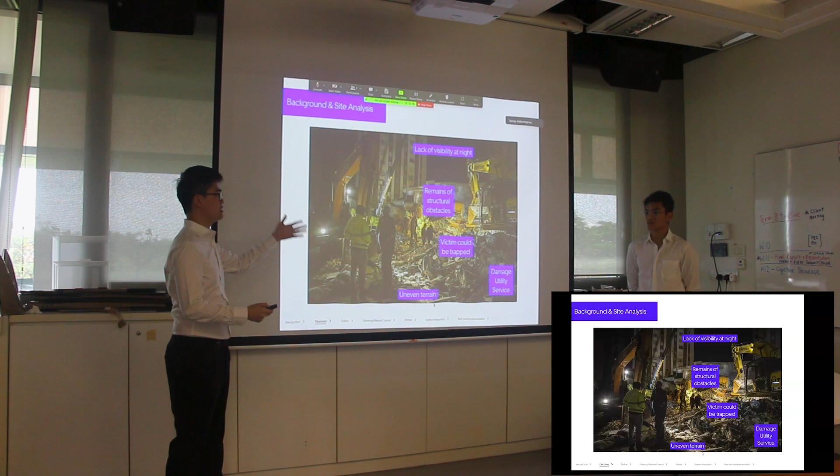Just to recap, we started with a very open problem statement and we narrowed it down by looking at disaster sites, identifying the challenges involved. We also conducted a study to understand the stages of search and rescue and identified that the reconnaissance stage is the most crucial. On top of that, we also did a stakeholder analysis to understand the personnel involved.

With all of the information that we have, we created the house of quality matrix and identified 6 important functional requirements for our project. But also considering the constraints that we have, we narrowed down our scope to only operate 1 drone, but simulate multiple drones working together, each carrying 1 detection mechanism.

With all of that, this is our refined problem statement: how might we optimize the search and rescue process in a disaster scenario using human-drone collaboration for enhanced target detection over versatile terrain.

To elaborate a bit, what we meant by guided autonomy here is that the human has to give a goal to the robot, but the robot has to autonomously decide the steps it takes to achieve that goal.

From all of that, we will give you an overview of our project, and this is how it looks like. We have the mission control, the sensor, and how they all integrate together with the drones. I'll pass my time to Paulong to take you through our mission control.

Thanks, Ivan. So we first start with planning. How can the drone know where to search given the user input of the hotspot? We do this based on metrics like guaranteed capture or minimum time capture. So we decompose the planning problem into 3 subtasks: clustering of the hotspots, assigning drones to the cluster, and finally, drone searching within the cluster.

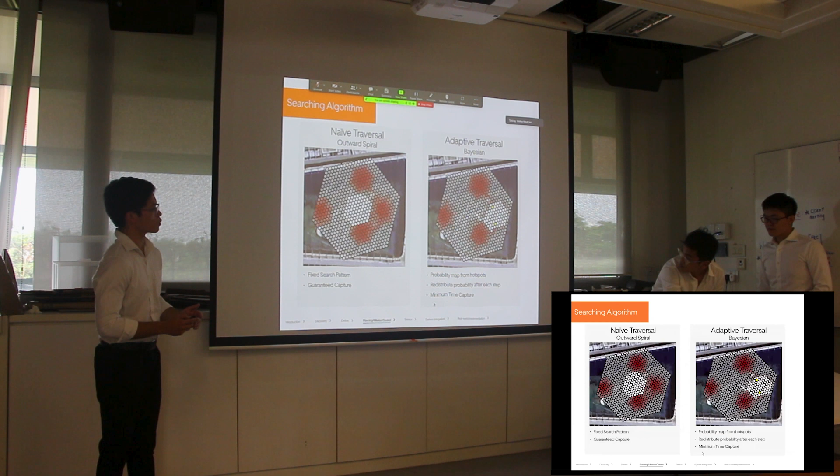For searching, we're focusing on naive or adaptive traversal and didn't try reinforcement learning because the first 2 methods have shown very promising results. On the left-hand side, for naive traversal, the drone will simply do an outward spiral. This goes for guaranteed capture by covering all the cells, while for adaptive traversal, the drone will aim for the area with the highest probability, aiming for minimum time capture.

With that, we have achieved our first checkpoint: scalability to larger areas using our search algorithm. Next we'll show how we integrate everything together into our mission control.

Thank you, Paulong. I'll be sharing about our mission control, which is essentially the user interface the drone operator has with the MASNRD system. So what does it do? The drone operator can input hotspots, which are objectives for the MASNRD system to search, and it allows you to define clusterings, do assignment, and also execute emergency drone actions, as well as real-time drone monitoring.

So this is the user journey that the user has when they interact with MASNRD. First, they input hotspots, and then the MASNRD system will cluster these hotspots. The user would then confirm clustering before assigning these drones to do independent search over these clusters. The drones will also feed back to the UI whenever they find a victim and conduct the search independently.

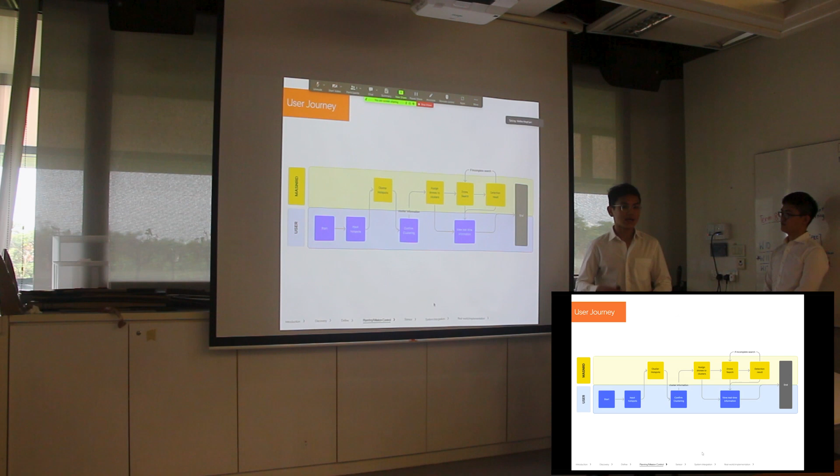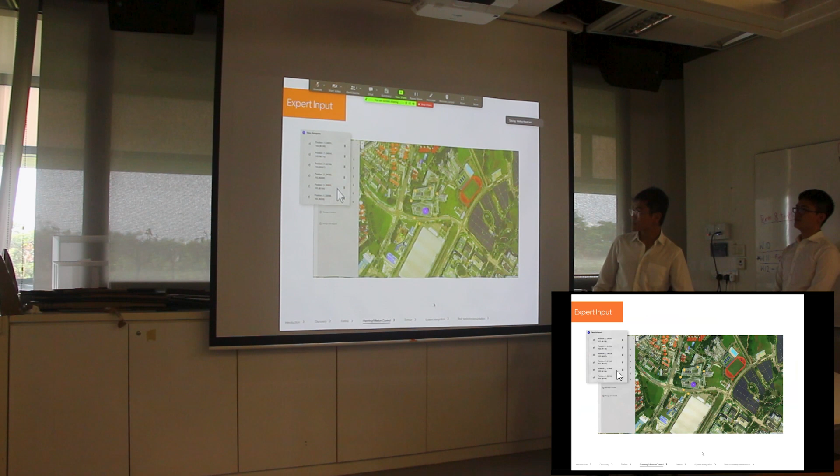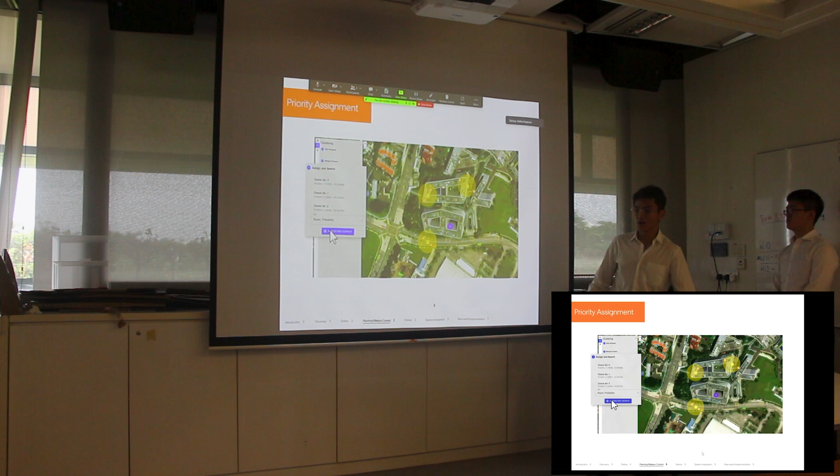You can also have expert input of hotspots, which will then be smartly clustered together, with neighboring hotspots clustered together, and then assigned in a priority queue to different drones before doing a probabilistic search over these clusters. So this is a demonstration of the user interface and how the drone operator can use it.

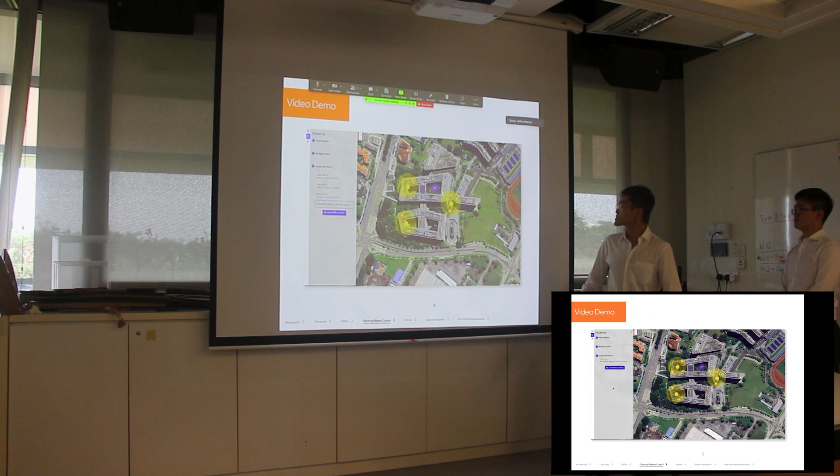As you can see, the drones are being dispatched to these different clusters, and over these paths, the drones would then search, and as you can see, the markers at the places where victims are detected are shown here on the map.

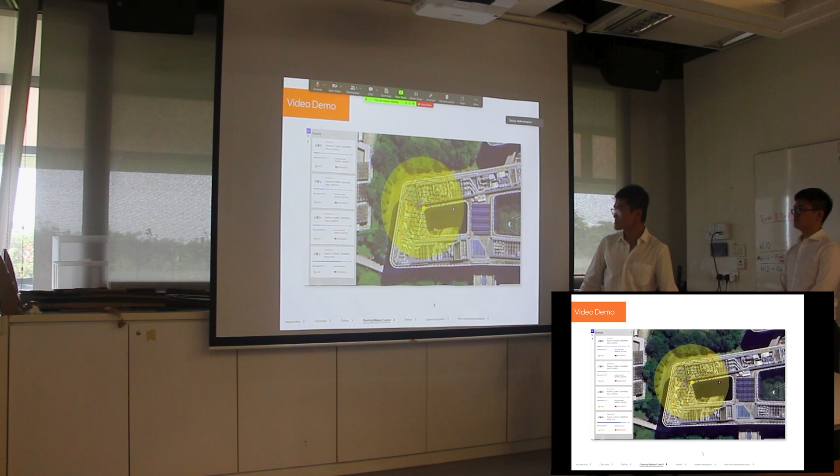So now we've achieved remote operation and guided autonomy. Now I'll pass the time to Axel, who will be sharing about sensing.

Thank you, Waishan. So our sensor is designed to detect RF signals based on the following design criteria: range, permeability, field of view, response time, and battery consumption.

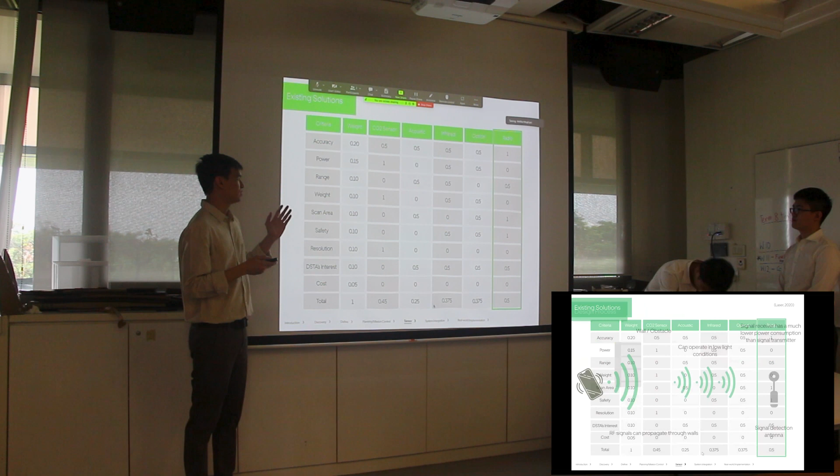Based on our literature review, we identified existing solutions used in search and rescue missions and weighed them against several design requirements. Eventually, we settled on radio as it was most suitable for our project.

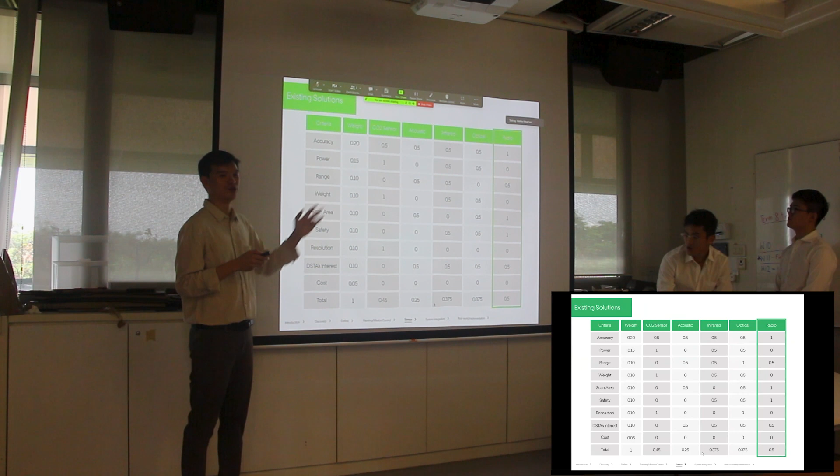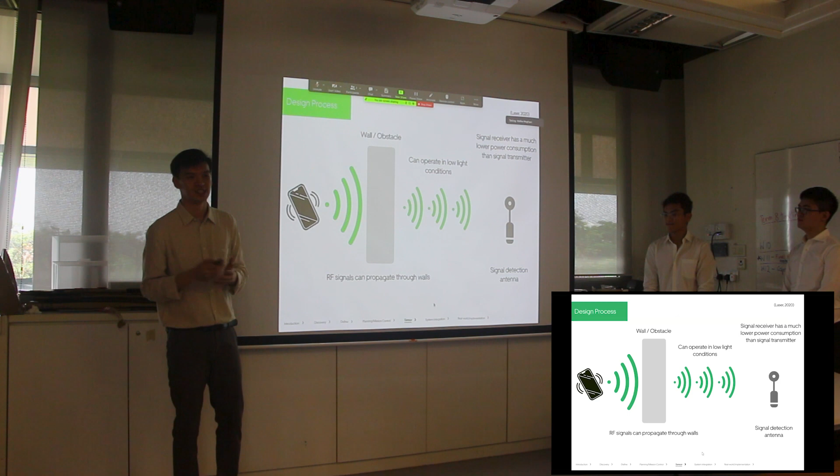Our latest addition is our final prototype, which detects and quantifies the RSSI of most RF signal sources across a wider frequency spectrum. It also comes equipped with a directional waveguide and is capable of FFT for signal processing. However, it is slightly heavier compared to the other prototypes we have developed.

An access point is paired with the sensor to spoof known access points within the disaster region. Because any mobile device with Wi-Fi settings turned on will automatically begin to connect to known access points, we can force a more consistent transmission of packets between connected mobile devices and the access point, making it more easily detected by the sensor.

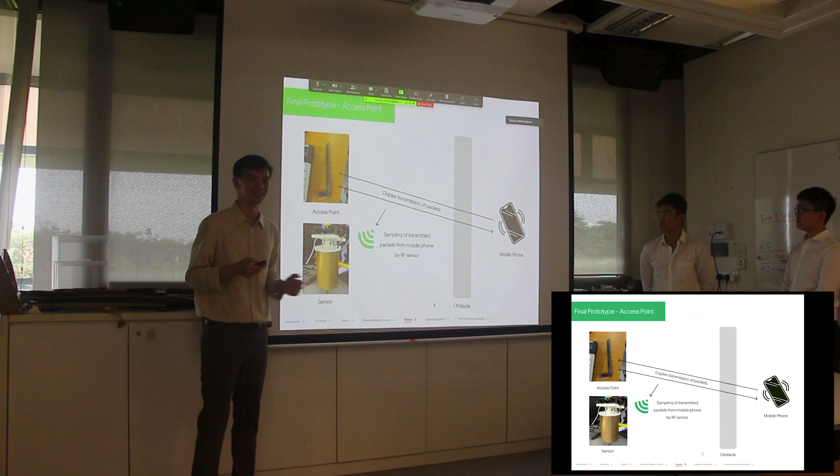Next, the onboard computer takes the FFT processed signals from the SDR to identify active communication channels. It uses unsupervised machine learning methods and a technique called HDBSCAN.

Now I'll pass my time over to Ryan.

Thanks, Axel. Now I'll give you guys a bird's eye view of our entire system. The middleware is the brain of the drone. It communicates with the flight controller to get GPS coordinates, hands it over to the path planner to compute path planning information, which is then handed back to the flight controller to tell the drone where to actually go.

In terms of detection, when the RF sensor detects a signal, it passes it over to the middleware, which hands it over to the mission control.

The mission control consists of 3 main components. The server arbitrates information exchange between users and the drones, while handling all necessary clustering and task assignment, while keeping the user in the loop.

In terms of firmware, our flight controller runs the PX4 flight stack, which can be controlled through remote control, mission control firmware like QGroundControl, or an onboard computer running ROS2. The last one is how we control the drone.

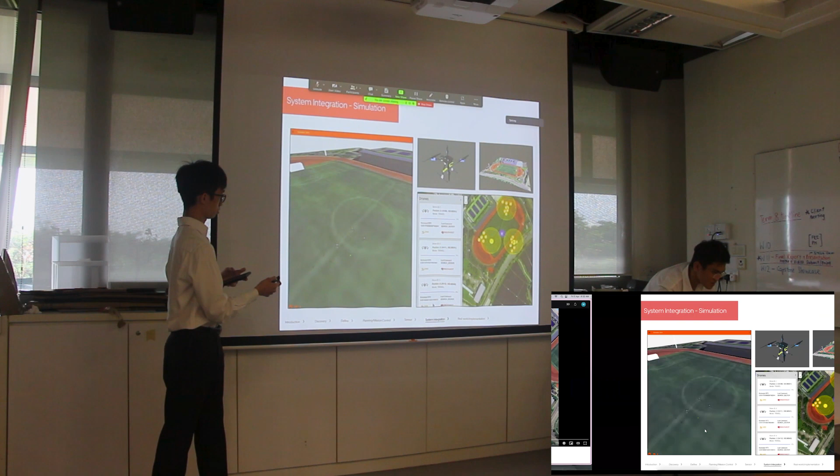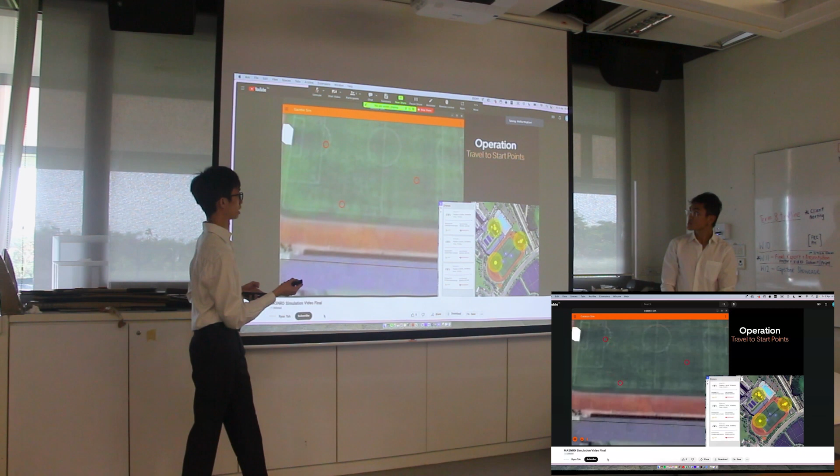First, the user enters several hotspots as shown here. The mission control computes the clustering and distributes these tasks to the drones. Then the drones will autonomously travel to the start points and begin conducting their own search operations. Over here you see an exhaustive spiral search.

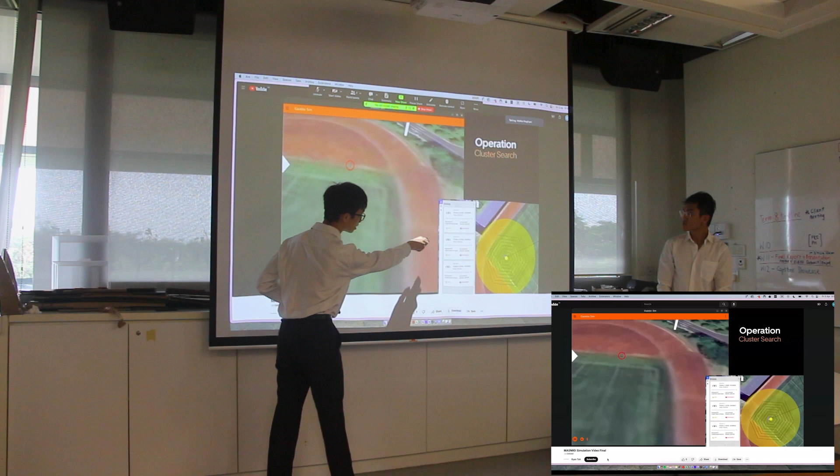Its mode, potential, and estimated connectivity are all reflected here in the GUI. In the event of an emergency, the user can still conduct emergency landings and all that.

So by testing the drone in the drone arena and in various environments in Gazebo, we can enable efficient testing in various terrains. Now I'll pass my time over to Kobe.

Alright, thanks Ryan. Now that we've seen the simulation, we'll be looking through the real-world implementation.

So this is the layout plan for our showcase and testing. We will be flying the drone around in the aerial arena with phones lying around on the floor here.

At level 7, our main operator will operate the mission control and will also connect the RTK base station there. For safety reasons, we'll have a drone operator on ground for emergency takeovers.

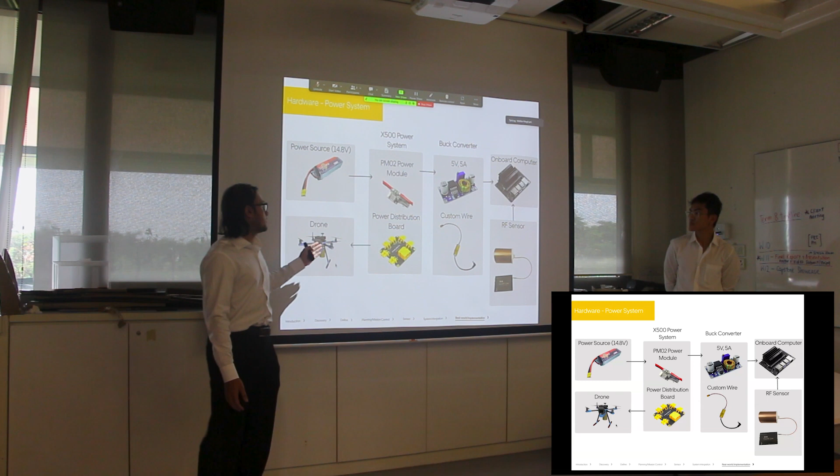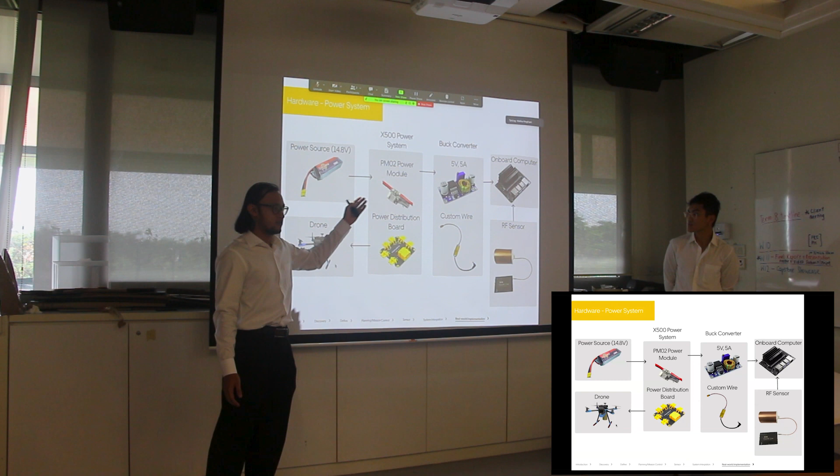To power our drone, we'll be using a 10,000 milliamp hour battery and we'll be using the existing drone power system to power both the drone and the onboard computer. For the onboard computer, we'll be stepping down the power to 5 volts, and we'll also be powering the RF sensor through the onboard computer.

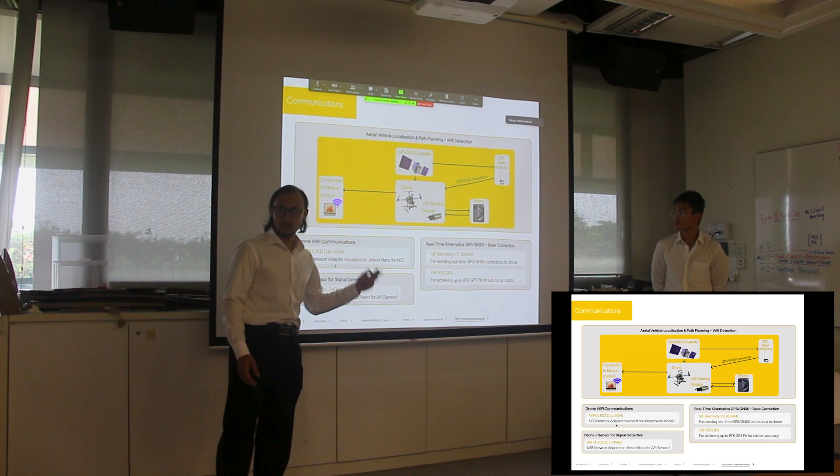The drone has several communication devices. First is the real-time kinematics for localization, and for communication with the mission control, we'll be using 5 GHz Wi-Fi, and we'll also be using a 2.4 GHz Wi-Fi for our AP, which tries to create a connection with the phone. Now I'll pass the time to Daniel to talk about our results.

The problem with this is that it requires the operator to input a lot of different waypoints. In a search and rescue mission, time is of the essence, and we need to ensure we can do it instantaneously. This capability is not available because the disaster situation is always changing, and we cannot instantaneously accommodate that.

One of the issues is also inaccurate GPS estimate, which can be understood from the telemetry communications. It's using a 915 MHz telemetry, so the data rate is not as efficient as using a 5 GHz telemetry, which can send more data wirelessly. While it is still customizable, it is inflexible because some components are fixed into the ecosystem. So we have a solution for that.

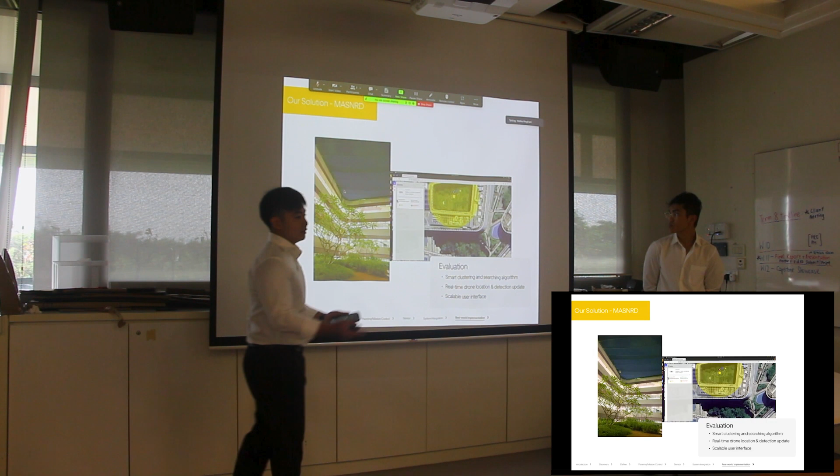That is quite useful for first responders because they can see in real time that there is a casualty there. More information can be seen here regarding the drone ID, so we know which drone we are tracking. We also know the lat and long, and also landing and disconnecting the onboard computer in case we want to debug the problem with respect to the drone.

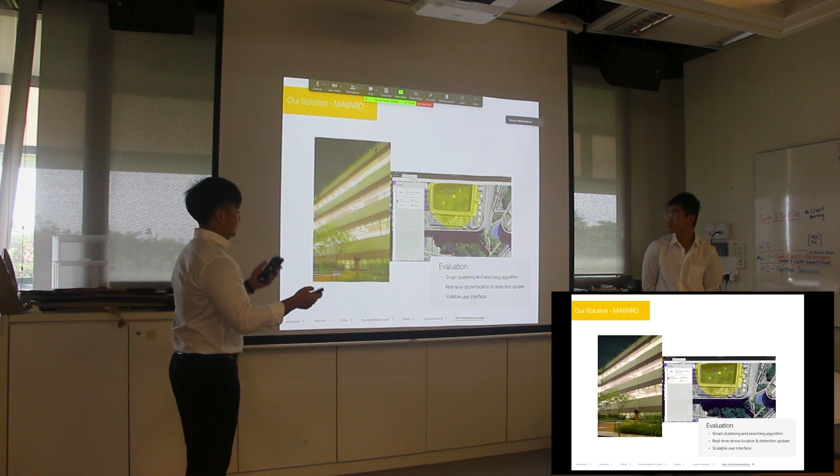So we thank you for your time. However, next we'll go on to the poster.

For the poster, we want to highlight 3 main components. The first is the sensor with the directional waveguide running the signal processing algorithm, doing some Bayesian processing. The second component is the Bayesian pathfinding for faster search, which allows both adaptive and naive traversal. Lastly is visualization, which is about the simulated environment in Gazebo and the mission control graphical user interface.

I just want to take this time to thank our academic mentor, Prof. Malika, for help, and our industry mentor, Jonathan, for his assistance, and Prof. Willett for his assistance throughout the signal processing, and Patrick for his help with the communication side of things. Yeah, thank you.

I think it's very impressive how the team has come a long way since the first presentation, the first iteration. There's a lot of good details they've gone through in terms of the engineering study and trade-off studies. Absolutely, absolutely. Thank you so much.

I think we're going to show a quick video for the demo. Are we? Oh, is this one? Is this the one that we showed? Okay, okay.

Then okay, then we will do Q&A now. So Jonathan and, sorry, you guys want to start off with the questions?

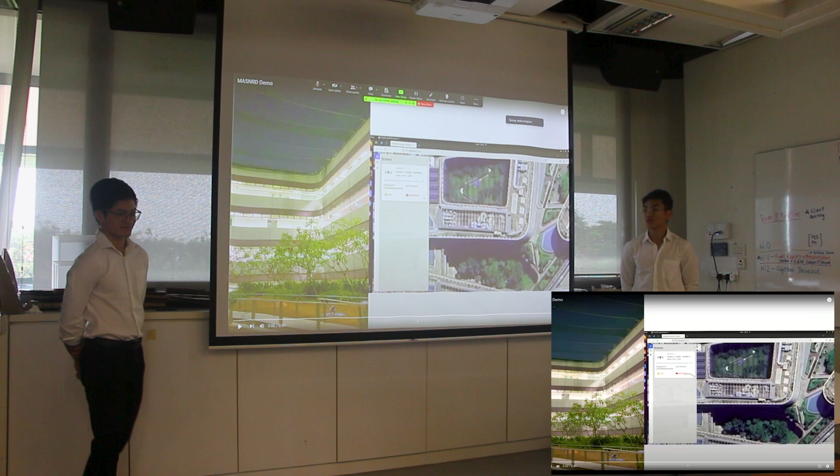Okay, great, good. What was your biggest challenge since the first iteration to now? Was it hardware, software, integration? Both.

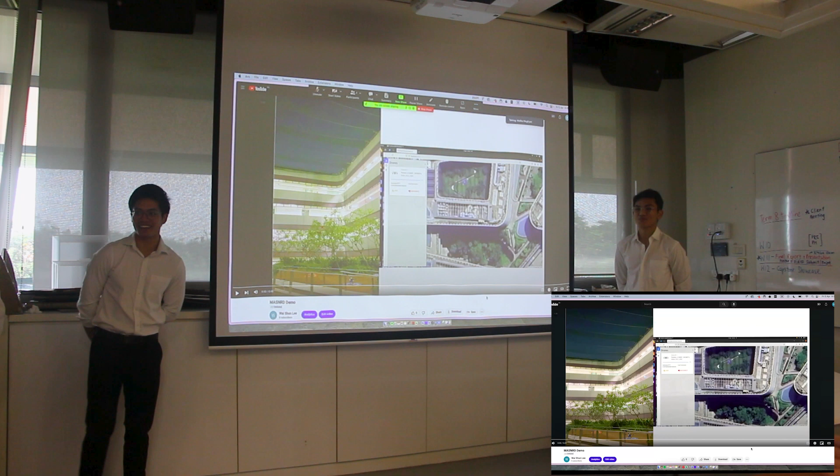I think maybe we start with the sensor. Maybe Ivan can shed some light on that. Maybe we can go one per area. Maybe we can share our sensor, but all be in view so that you're in the camera view.

Okay, so developing the sensor was one of the major challenges we faced in completing this project. For half the time of this capstone project, we were analyzing signals in the time domain, which proved to be quite fruitless because, given the high frequency of the RF signals, we cannot capture any noticeable change in the signal in order to accurately quantify that there is an active communication channel there.

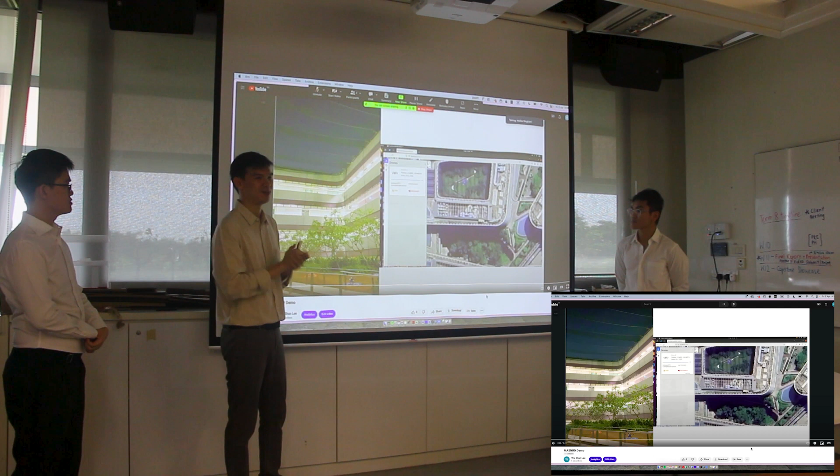We had to make the swap to the HackRF One SDR to use fast Fourier transform, so we could do processing in the frequency domain. That allows us to see the contributions of the different frequency components when we detect a signal, for example. That thing is a lot more noticeable, and it's much more efficient in extracting the data we need for signal discrimination.

We must also be aware of how much computing power we have, because we just have limited power. So initially, when we tried to sweep a very detailed waveform, it was actually taking a lot of time, and a lot of data to process at the same time. We had to try and error to find a sweet spot, to see how often we should sweep, what bandwidth we are sweeping at, and also how it can be quickly processed.

We also tried out different kinds of unsupervised machine learning methods to experiment and explore which one performs the best. I think one of the highlights we want to talk about for HDBSCAN is the fact that it doesn't require us to pre-specify how many clusters or how much to differentiate.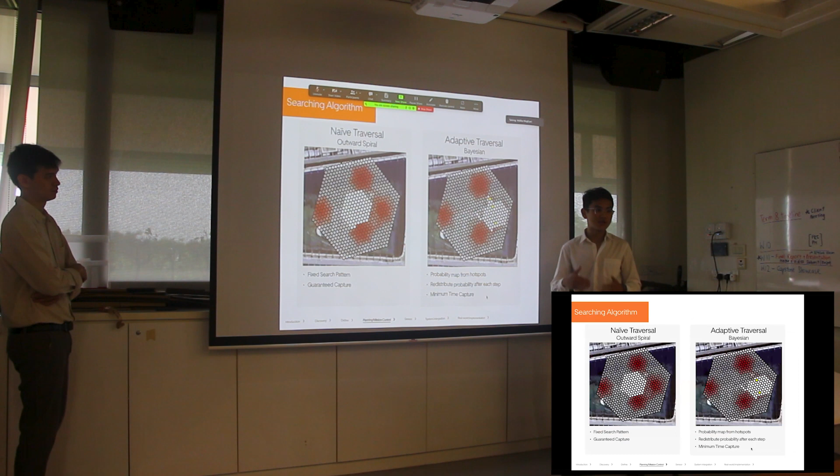So when we did our field trials, we had to account for that and add different checks, like can we adjust the angle of movement, can we look at how fast or slowly it moves—hyperparameters we can change in terms of adjusting the algorithm so that it works in real life.

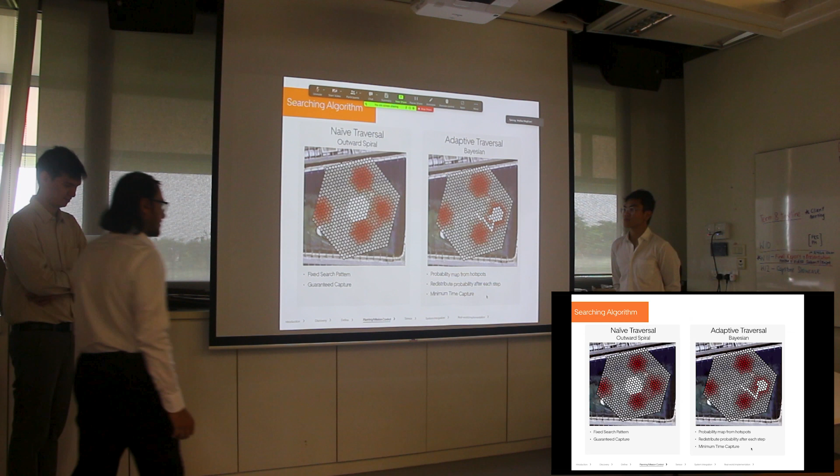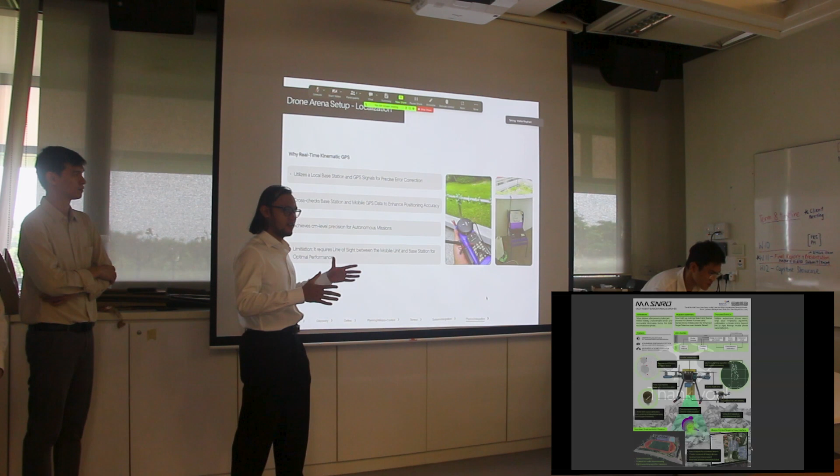In terms of testing, we had problems with localization because our drone originally relies heavily on GPS, and because the drone arena is an enclosed area, the GPS doesn't work well. We tested if it was a GPS problem, and found that it was because of the drone arena—we flew it in Marina Barrage to test the GPS and it was fine there.

Thankfully, the Trust Lab has a built-in RTK antenna on top of level 7. We tested it out and managed to get pretty good localization as well.

Let me elaborate more. The RTK antenna is basically sending GPS or GNSS corrections to your GPS, because GPS alone is not as accurate. This antenna is located outside of SUTD, and that, along with your drone's F9P RTK GPS, is able to compute all the differences, giving a much higher localization capability for the drone.

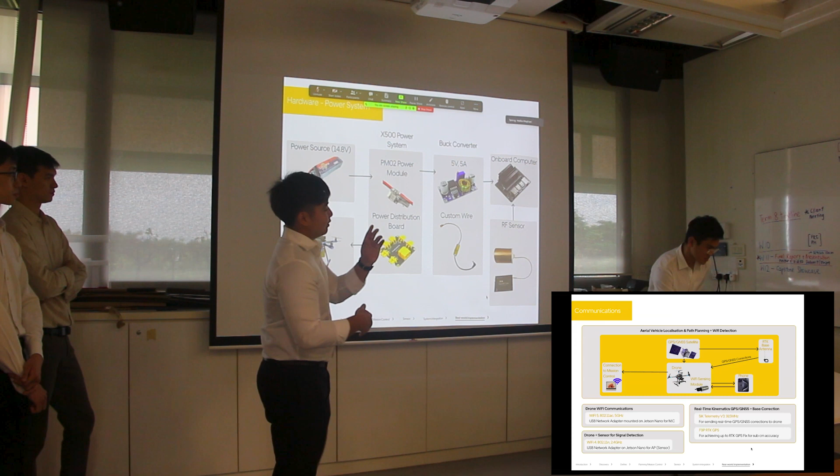Another thing I want to discuss is the communications side of things. Initially, when we wanted to run ROS messages over to the drone via the ROS stack, we wanted to use PPPD, a point-to-point protocol daemon. However, the problem was that when we tried to use it, it seemed to interfere with the communications, so we opted to use the SUTD drone arena Wi-Fi to send the communication over, and we found that it worked somewhat better.

I'm pleased that you had to go through the challenges, especially for the GPS accuracy, because in real life your GPS will not be so good. So it forces the team to find alternatives, like putting an RTK antenna somewhere higher, on higher ground. So whether it's intentional or not, the SUTD drone cage GPS degradation is really good for drone teams, I feel. It doesn't give you the ideal world state, which is what you're really designing for.

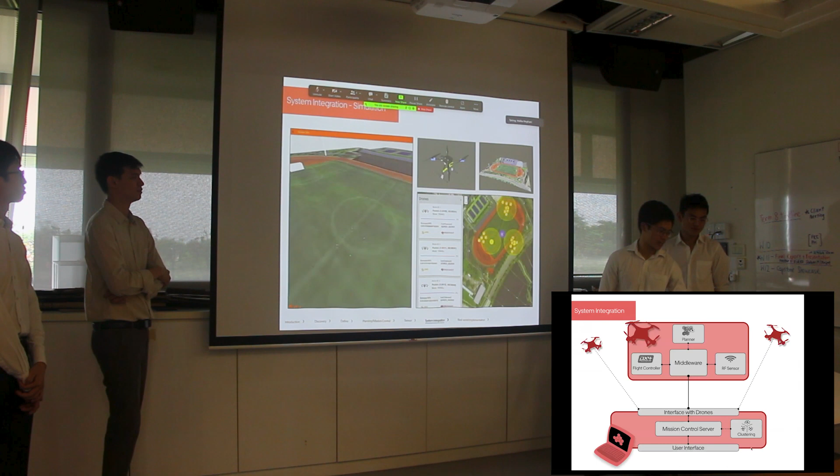Just to add on, everyone has like a piece of the sensor, the drone, then every single part has its own challenges. But the biggest challenge I think is how we integrate all the components together. When we put everything into the drone arena, when we do all the bench testing on the Jetson, on the battery, on the power plug, everything works fine. But when the drone starts to fly, you have all the systems running on the same onboard computer, and on battery, then we start to have a lot of problems.

So this video, we actually only managed to capture last night, at the very last minute. We spent day after day trying to integrate everything together. Sometimes it rains, sometimes there's a bug, no battery or something. So yeah, the integration is also one big challenge. Especially for real life, even in the working world, you worry the night before it starts. Well, praying.

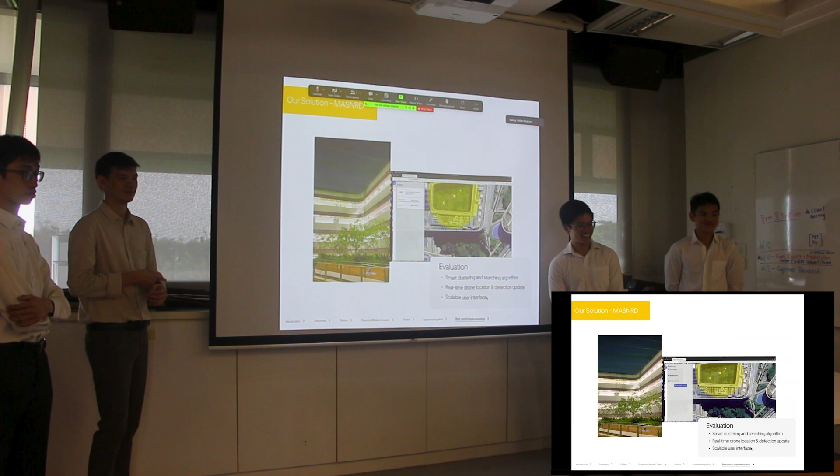So what was the main problem that you faced before that last night? What were the main issues?

So we have a few integration steps. We first tested with this QGC baseline, which just controls the drone by sending latitude and longitude based on this. Then we convert over using our own mission control. For this, we need to integrate our own search algorithm inside, and we have our own communication link. The communication link when you use telemetry is very weak, so we switch over to using Wi-Fi 5 GHz. And with that we had to try out a few different ways to set up the Wi-Fi.

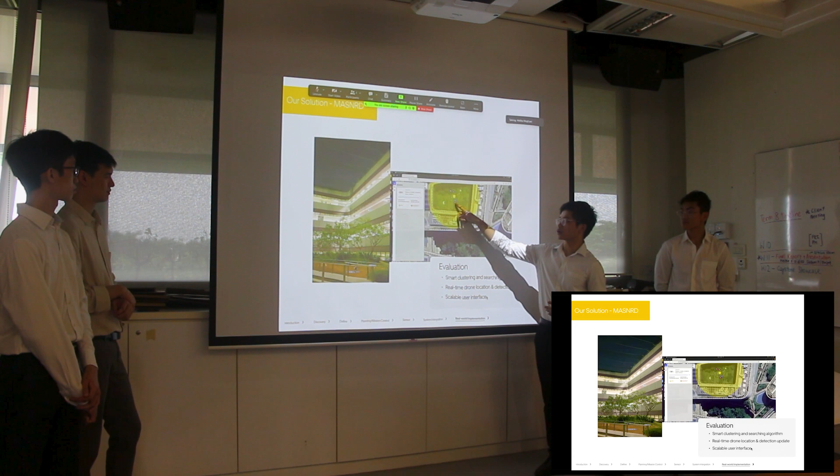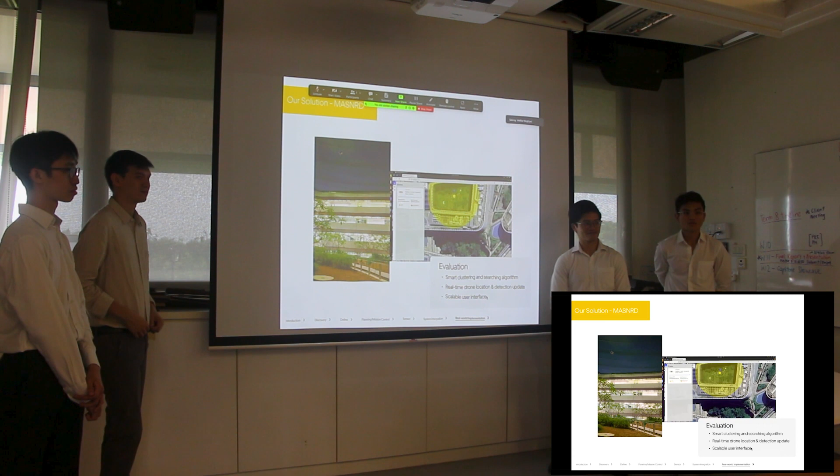And last night was our final step in the integration. We tried to have real-time detection shown here. So you can see you have one phone here, then another phone here. Then as the drone covers, you will spot two detections. So that's what we try to show you guys later at 11:30.

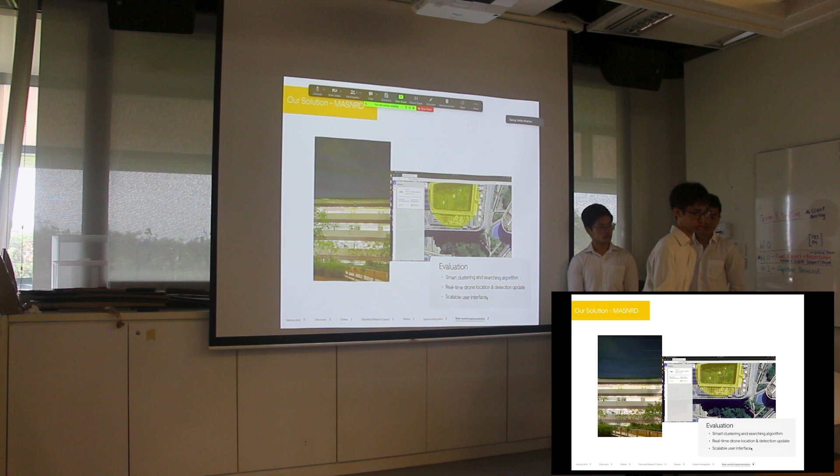So the QGroundControl one that he mentioned earlier was direct to the flight controller, but for our system we needed to arbitrate everything through the onboard computer, which posed more issues in terms of simulation as well as transferring from simulation over to the physical implementation.

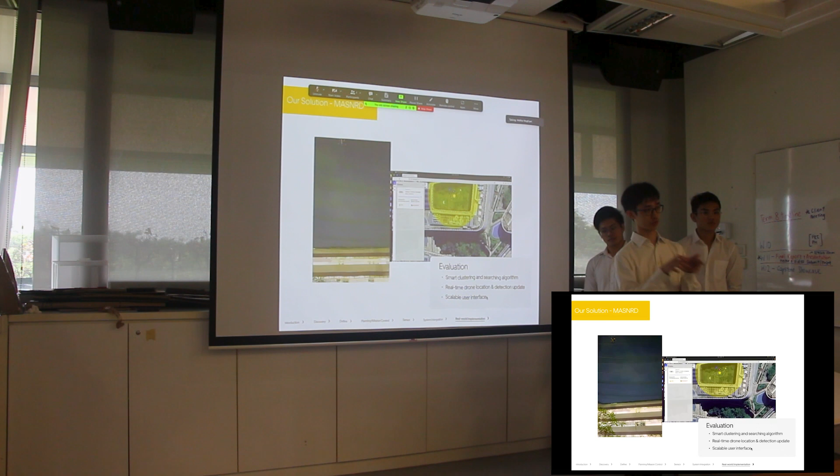So now you have the first working prototype, everything's working. Right? So what do you think will be the main improvement you would want to make if you were to continue the project? I think one of the biggest problems we've seen so far is how can we get a very sensitive sensor detection. When doing this, you need to manage the threshold a lot, and depending on the noise of the environment, you need to either raise or lower the threshold. So that's one thing where we maybe can use some smart algorithm to detect the threshold instead of manual adjustment.

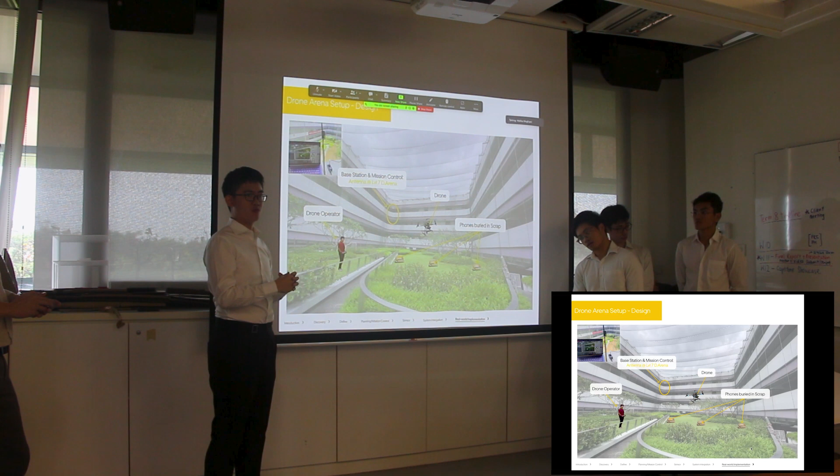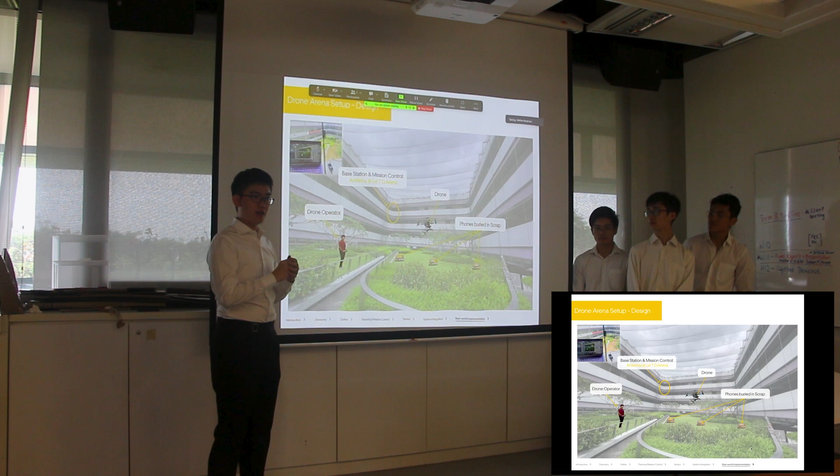And then just to add on, I think in the real world scenario, we can use more than one detection mechanism, because we can understand it as sources of information. If you're just relying on one particular source of information, it could be limited. So we think that if further development could be added with more detection mechanisms, but for the scope of our project, with the time that we have, we wanted to do something that is more novel, and that's why we limited it to just Wi-Fi detection. If we have more time and more scope, then we might want to involve computer vision, infrared, or other kinds of detection mechanisms to form a better understanding.

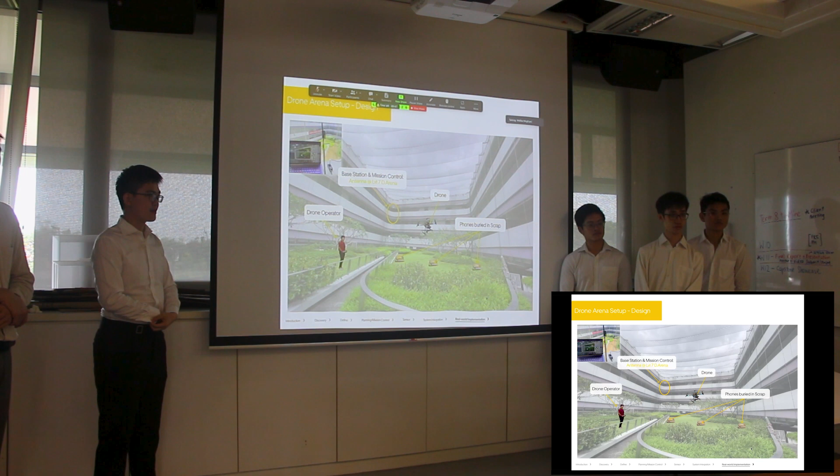Do you want to upsize the drone? Yeah, multi-drones?

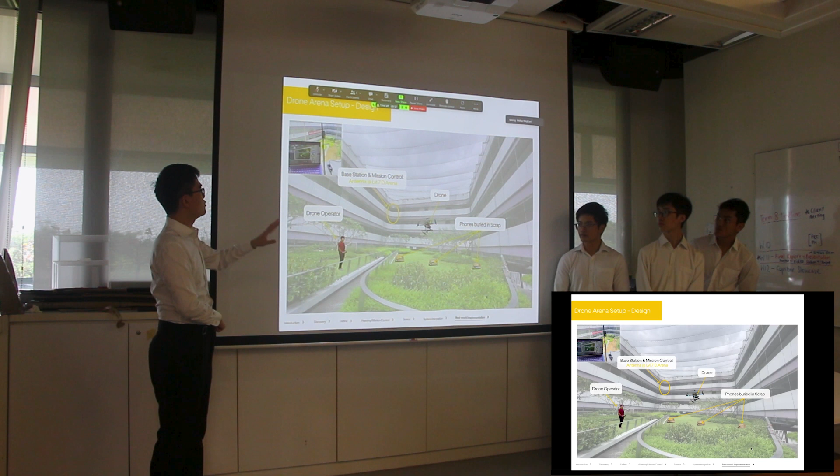So I think for a multi-drone system, we worked really well to have the simulator working with multiple drones. But in real life we faced challenges with multiple drones flying together. There are also safety concerns, because the drone operator had to manually take over, especially even flying this current single drone.

The manual takeover is a very important feature, and it's usually quite taxing for the drone pilot to stay focused and make sure everything is safe. So to fly multiple drones at the same time, we might need a bigger team to handle the physical constraints we're facing. A more physical demonstration of multiple drones is something we want to achieve, but at least on the simulator, theoretically, it will handle multiple drones.

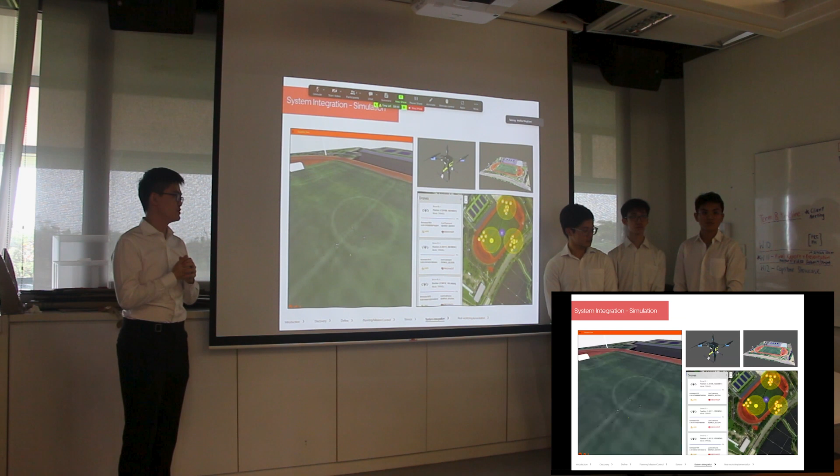And you want to say something about ROS too? That's the latest industry standard, recently released. ROS 1 used to be the standard for industry and academia, and ROS 2 is the latest one. People are making sure all their newer systems work with it, because the older packages no longer get work done in the ROS 2 domain, so they've built it with the latest and best package system.

So that's really good, and it allows a high fidelity conversion from simulator to the physical world. The gap is very little. They can literally create high fidelity models of the drone in the simulator, and all of this can be transferred into the physical world.

So that's one of the biggest trends. We've been waiting for people to go on ROS 2. Exactly, it's a big thing for robotics around the lab. We have some dinosaur code as well from ROS 1. We have to do it someday.

Any questions, Jonathan? Very good. I think it's good, very good effort by the team. The team is big, but when the team is big it also brings complexity to the project, which probably is needed. It's good that in the end you came together, because at the midterm demo it was still a little far from what we see now. A lot of work has been done in the past few weeks to reach this stage. Good job.